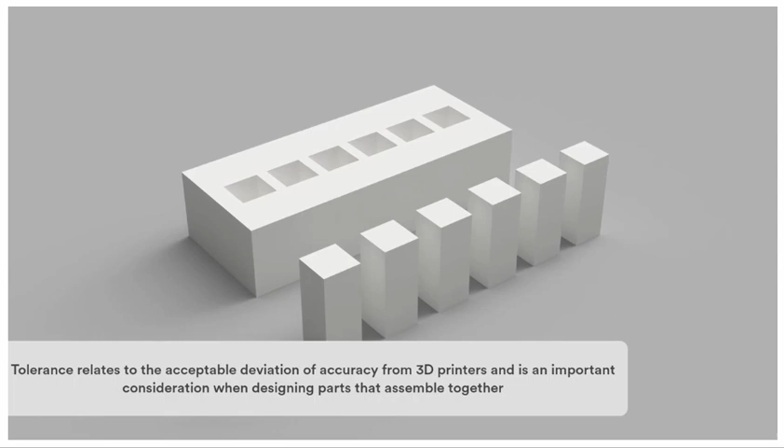...from 3D printers and is an important consideration when designing parts that fit together. In Tinkercad, we're going to draw a base with a series of holes cut out of it. Each hole is 10 mm in length and 10 mm in width.

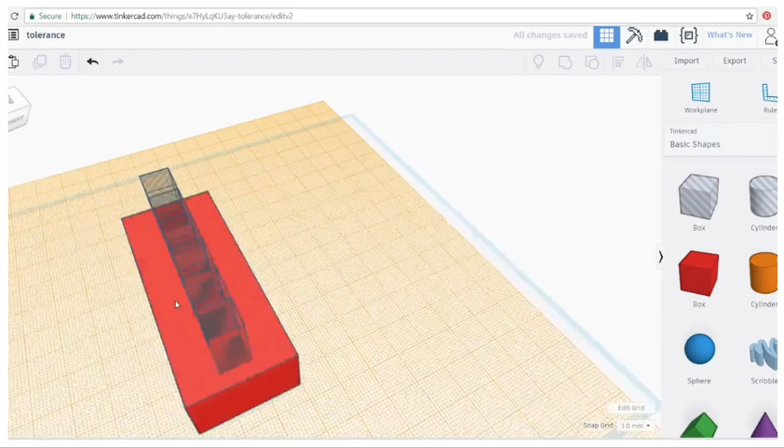Next to each hole, we're going to draw a box. Box 1 will be 10 mm in length and width, and that's the exact same size as the hole we will be trying to slot it into. We're going to make box 2 slightly smaller, 9.8 mm in length and width.

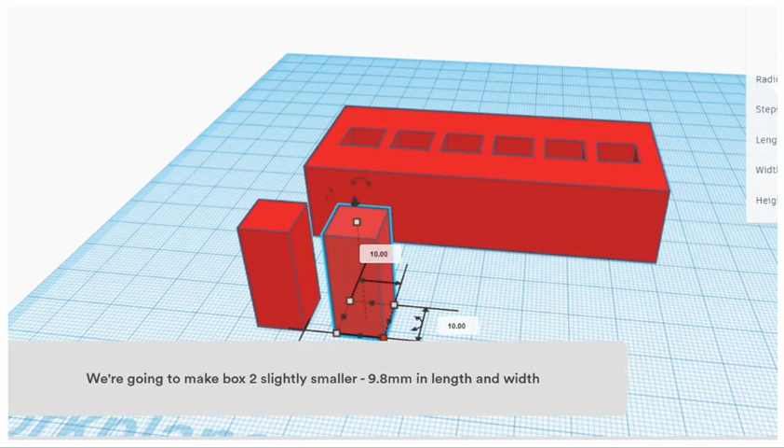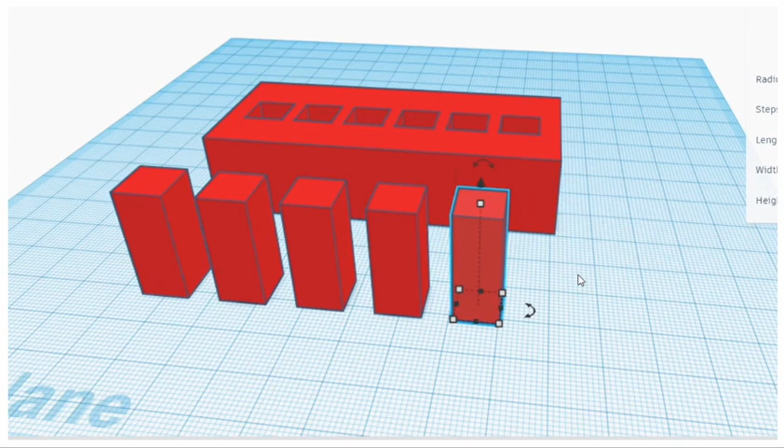Box 3 will be 9.6 mm in length and width, and we'll repeat the pattern so we have a range of boxes from 10 mm to 9 mm in length and width. 3D printers tend to print holes smaller than they actually are, and this is down to several factors. For example, the materials are squashed down onto the layer beneath.

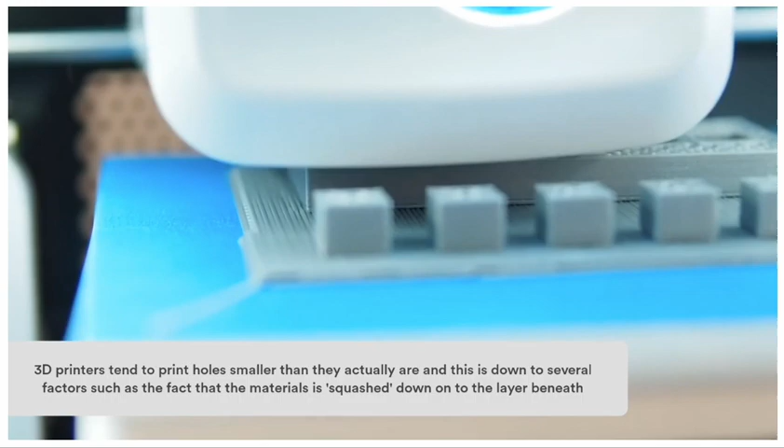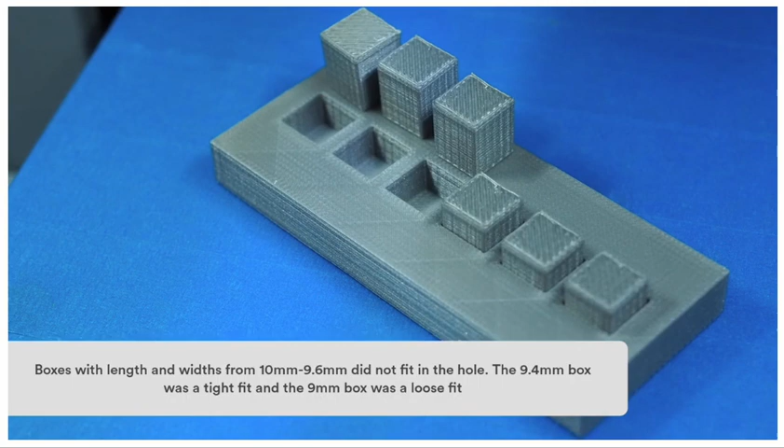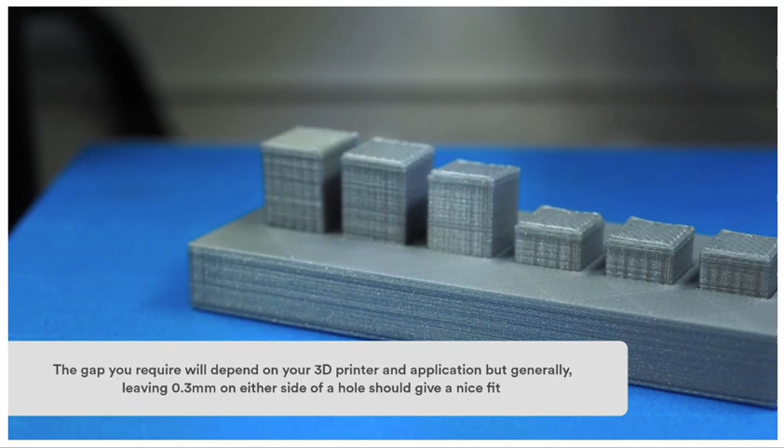Boxes with lengths and widths from 10 to 9.6 mm did not fit in the hole. The 9.4 mm box was a tight fit, and the 9 mm box was a loose fit. The gap you require will depend on your 3D printer and application, but generally leaving 0.3 mm on either side of the hole should give a nice fit.

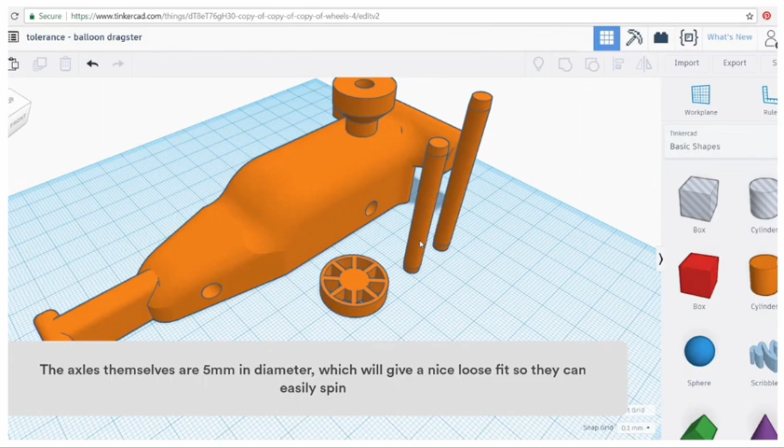This balloon-powered car requires some thought about tolerances. These axle holes are 6 mm in diameter. The axles themselves are 5 mm in diameter, which will give a nice loose fit so they can easily spin.

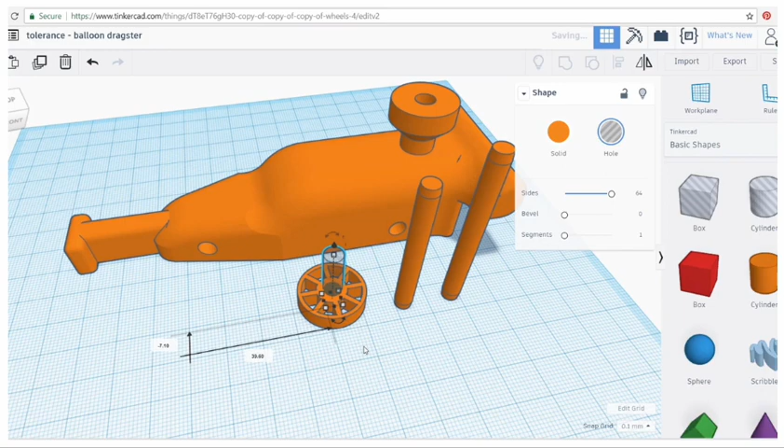The axles need a tight fit with the wheel, so a diameter of 0.3 mm more than the axle should be a good fit. Remember that there are several factors that affect the gap required in the design process, so the best way to get it right is to experiment.